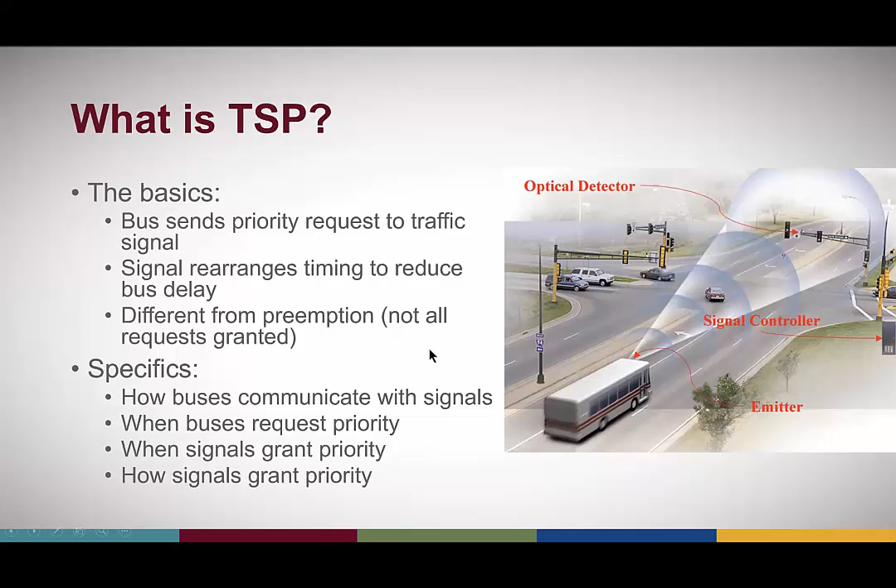There are many specifics when it comes to how a TSP system could be designed and how it could work. There are differences across systems in how buses communicate with signals, when buses might request priority, when signals might actually grant priority, and how signals grant priority, what type of priority they actually give. So there's a lot of specifics and details, and every deployment we've seen is a little bit different from others. But that should give you a basic understanding of what TSP is.

Now, we're going to use some terms in the webinar today, and these terms are also used in the report, which is Synthesis Report 149. We use the term TSP system to refer to the hardware and software components and modules that are working together as a whole in order to give priority.

We'll talk about system architectures, which are the functional design of the hardware, software, and communication interfaces. How is the system actually put together? What type of communication technology is being used, et cetera. That is a system architecture.

And we'll also talk a lot about business rules and parameters. When it comes to TSP, like I mentioned earlier, not every request for priority is granted. The decisions and the rules for granting or requesting priority, we call those the business rules. Those are the business rules of the TSP system. When should a bus ask for priority, and when should it be granted?

Parameters are the specific values that are associated with a business rule. So if there's a business rule that buses have to be late before they ask for priority at an intersection, well, the parameter is how late, right? Is it 1 second late, 20 seconds late? So the parameters refer to those specific values associated with business rules.

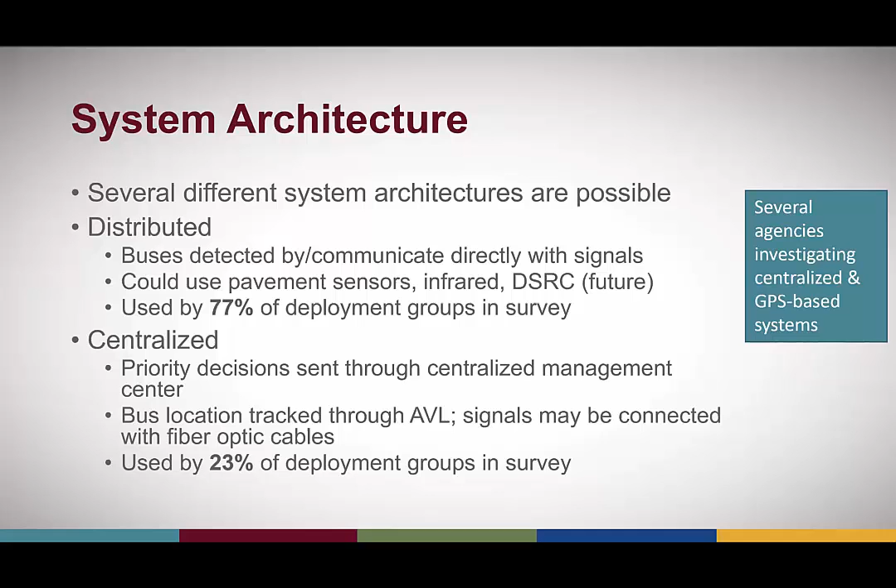This distributed setup was used by 77% of the deployment groups in our survey. The other big grouping is centralized architectures. In a centralized architecture, priority decisions are sent through a centralized management center, which could be the transit agency's management center, or a traffic management center managed by the signal owner, or potentially involving 2 centers. In this type of system, the buses' location is tracked continuously through AVL, an automated vehicle location system, and the signals would have to be linked to the center in some way, one method being through fiber optic cables. This kind of setup was used by 23% of the deployment groups in our survey.

One of the other key distinctions is whether there are any operational status requirements that buses have to meet in order to request priority. In our study, 13 respondents said that buses do have to meet a condition before they're able to request. The most common condition, which all 13 were using, was schedule deviation, meaning a bus has to be behind schedule, either behind at all or behind by some amount, which is the parameter value also in our report.

One thing mentioned in several research studies was that this could be done by headway deviation as well. We didn't capture any agencies in our survey currently doing this, but we did capture 2 agencies that had a passenger load requirement, meaning a bus has to be carrying a certain number of passengers, otherwise it's not eligible for priority. But overall, the majority of agencies that responded, 18 of 31 deployment groups, were not using any operational status condition.

There are several different types of priority that buses can receive when they send a request. These are explained in more detail in our report, including diagrams that show the signal phases and how they will be rearranged to give a bus some priority. But broadly speaking, the most common one, used by 28 of 31 deployment groups, was an extended green, which just holds a green light a little bit longer to give the bus time to get through.

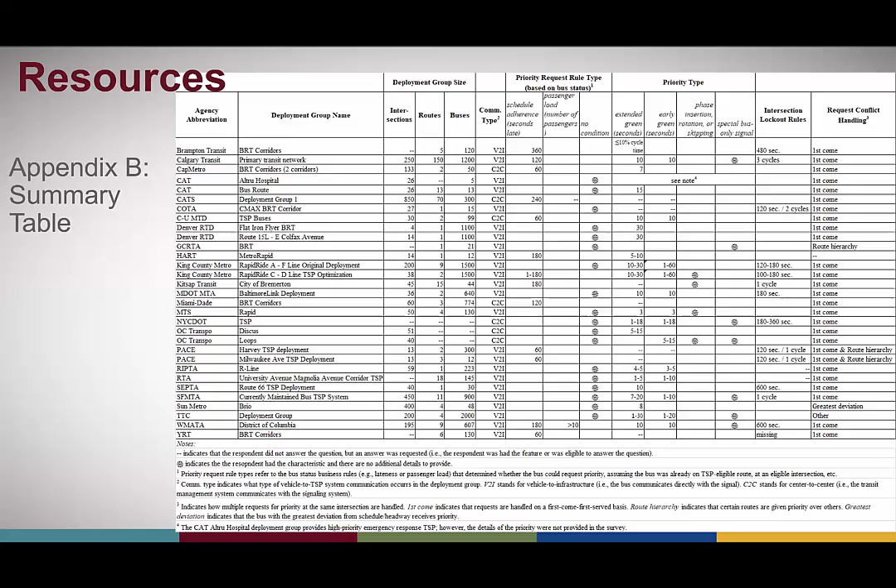For the next phase of this webinar, we'll hear from two of the case study agencies. With that, I'll turn it over to Owen Kehoe. Thank you, Paul. Let me get my screen shared here.

My name is Owen Kehoe. I'm a traffic engineer at King County Metro Transit in Seattle, Washington. I work in a group called Speed and Reliability, and I've been working on TSP for almost 20 years now, doing everything from planning to design to implementation and sometimes maintenance when needed.

So today I'm going to first share some King County facts and show you where we have TSP deployed. I'm going to talk about our TSP system architecture, the TSP goals we've employed, specific TSP strategies we've used. I'll outline a negotiation process that we use with our city partners and how we agree on what we're going to do. Then I'll talk about some of the benefits we've measured, and then a preview looking towards the future of our next-gen TSP system.

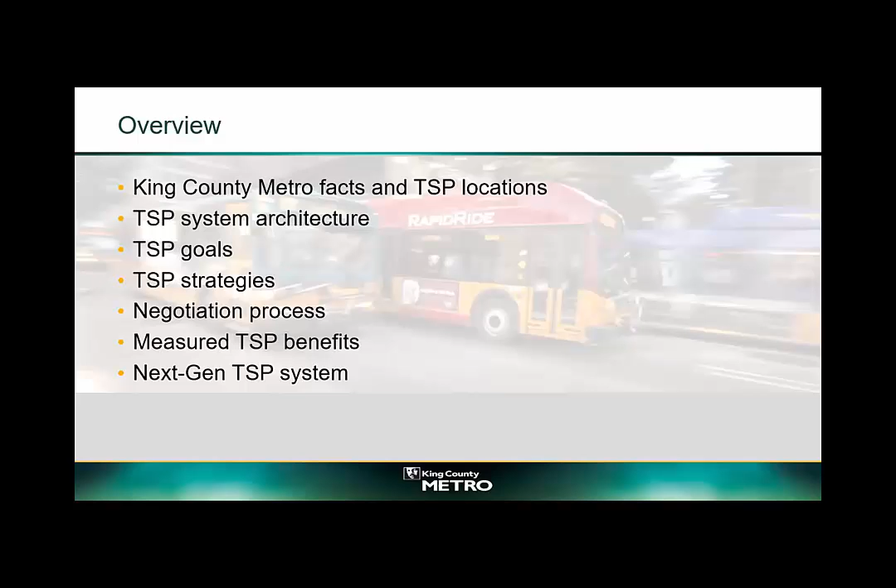For those not familiar with King County Metro, here are some quick facts and figures. We are the primary transit agency serving Seattle and the surrounding area. Our fleet size is a little over 1,600 vehicles, including electric trolley buses, diesel electric hybrid buses, and a few battery electric buses. Just yesterday, we retired our last diesel-only coach, so we consider ourselves a fully green fleet. Before COVID, we had about 400,000 daily weekday boardings; of course, that's lower now. Also, Sound Transit is the regional transit provider, and we operate their light rail trains, streetcars, and Sound Transit Express buses.

For TSP, we currently have it deployed at a little over 200 intersections. These are mainly on the RapidRide corridors, which are BRT service, so we have the A through F lines. We also have it on a few other high ridership corridors. Of these locations, we work with 13 cities or jurisdictions, including the state DOT for TSP.

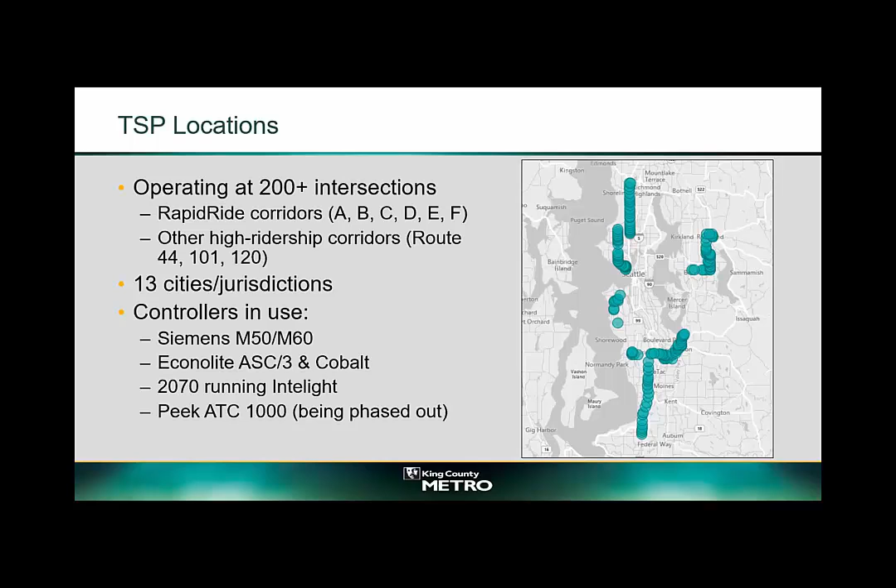The controllers we use, mostly we use the Siemens M50, M60 controllers. That's what Seattle uses. Some of the suburban cities use the Econolite ASC3s and Cobalts. The state DOT uses 2070s running Intelight MaxView. And we have a handful of Peek ATC 1000s in the city of Seattle, although those are gradually being phased out.

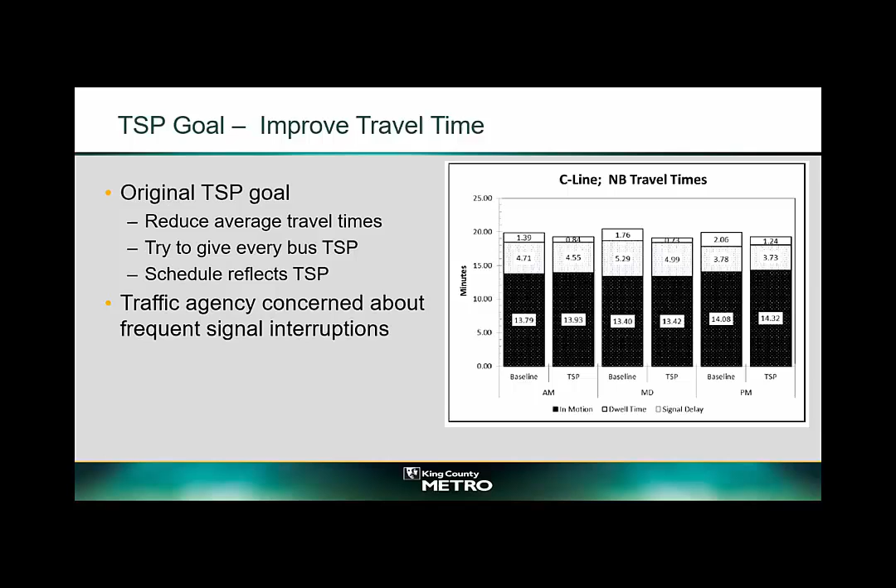Here you can see an evaluation of this strategy. This is travel times split up by in-motion, dwell time, and signal delay, and you can see we've been successful in reducing the signal-related delay with TSP. The disadvantage of this goal is that the traffic agency will be concerned about the signal being interrupted every time, which limits the amount of benefit we're able to get through individual TSP calls.

A newer goal we've been doing is a reliability-based goal. Instead of trying to give every bus TSP, we're trying to focus on those late buses and get them through faster, with the goal of improving either on-time performance or headway.

Now getting into some of the strategies we use, we have what we consider standard TSP strategies, similar to the ones Paul described: green extensions, early greens, or red truncation. In some locations we do what's called full priority, a Siemens term, which is basically allowing phase skipping.

The business rules we use: we have route eligibility, so generally only specific routes are eligible for TSP. We have to provide a recovery period after one TSP activation, usually varying between 60 seconds to 5 minutes. And of course, we can't violate any minimum greens or vehicle or pedestrian clearance intervals.

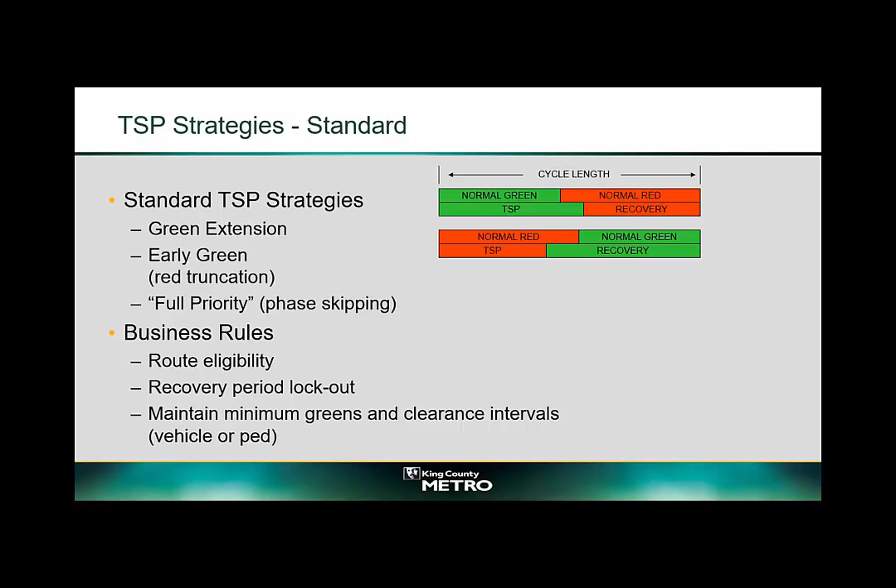Some of the more advanced strategies we've used are, in some locations, a tiered request level, where depending on whether the bus is on time or late, it will request a different level of TSP.

In some locations, we proposed doing cascading priority. So if you have a bunch of intersections close together, one bus will check in at multiple intersections at the same time. So far, we've only been able to do this in theory. We haven't been able to deploy a cascading priority system yet because it requires a pretty complex peer-to-peer setup at the signal controller level. We just haven't been able to get that up and running yet.

We also do priority at nearside stops. The way that works is we have the bus check in before the bus stop, and then we look at our historical dwell time for that bus stop. We try to predict when the bus will leave, and that gets programmed into the controller as the time of service desired setting. It's basically an ETA.

This chart shows how we plot the dwell time, and we're looking at that. This is a cumulative dwell time distribution.

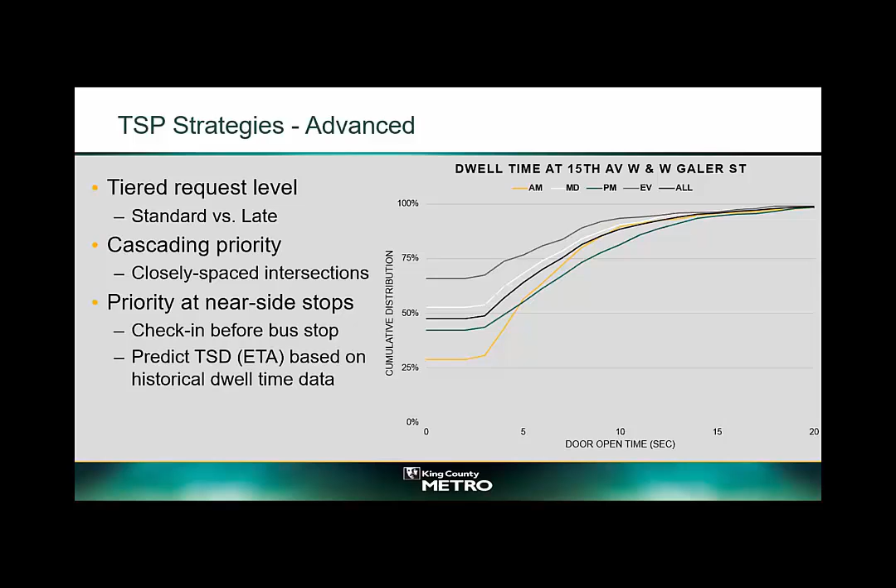Some of our city partners have installed adaptive signal control, and we've successfully integrated TSP into those. In Seattle, they run SCOOT, which has a pretty extensive set of capabilities for extensions, red truncations, and phase skipping. We've tested this at just one location so far, First Avenue North and Mercer Street.

But there'll be more of these to come in the future. In the city of Bellevue, they run the SCATS system, and unfortunately it doesn't do TSP out of the box. So we've had to kind of jury-rig it by adding extra stages that provide those green extensions and early greens, basically using a detector call to then call that special stage.

In the city of Renton, they run ACS Lite, and it does kind of the standard extensions and truncations.

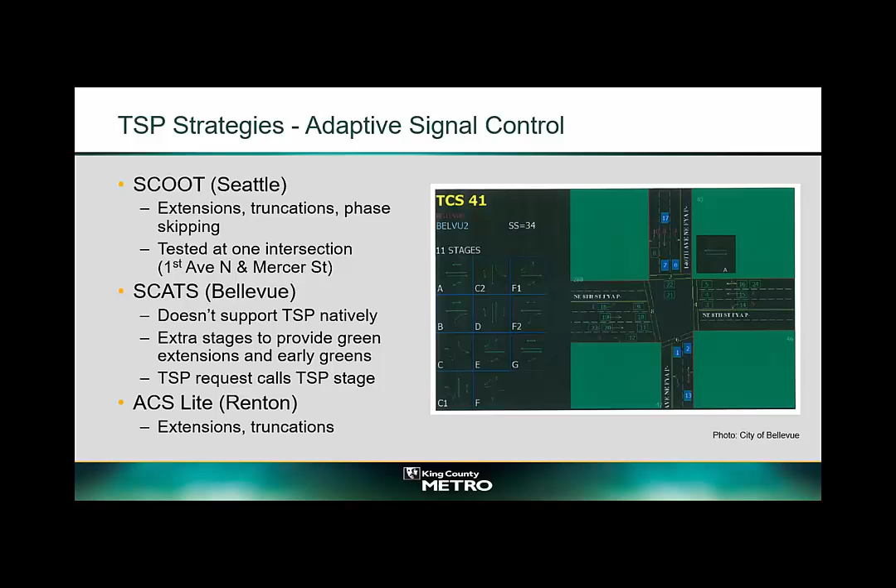So now I'm going to outline what I consider to be a 4-step process for negotiating the TSP strategies with the local agency, and I think we've been pretty successful in using this process.

The first step is agreeing on the overall project goals. What are we trying to do here? Are we trying to reduce travel time? Do we want to improve reliability? Which routes are we going to focus on? These are pretty high-level discussions, involving directors and planning staff. A lot of times in smaller cities in particular, the traffic engineers may not be so keen on TSP, but sometimes we'll find an ally in the planning department.

And we're looking at data on route level performance to help inform these decisions. Step 2 is we start looking at individual intersections and trying to decide what we're going to do at this intersection, at this time of day, in this direction. This involves kind of the mid-level manager staff. So we look at delays, we look at the data about where the delays are occurring, we look at traffic volume to capacity ratios and pedestrian activity, particularly if we're proposing phase skipping.

We really get down into a fine-tooth comb, defining what strategy is used by direction and time of day. The key outcome is that we come up with a spreadsheet that documents all these decisions. This is an excerpt of that spreadsheet. We've got all our intersections listed, all directions, and then by time of day we're documenting which strategy we're doing, and if it's a lateness strategy, how many minutes late it has to be to trigger that strategy.

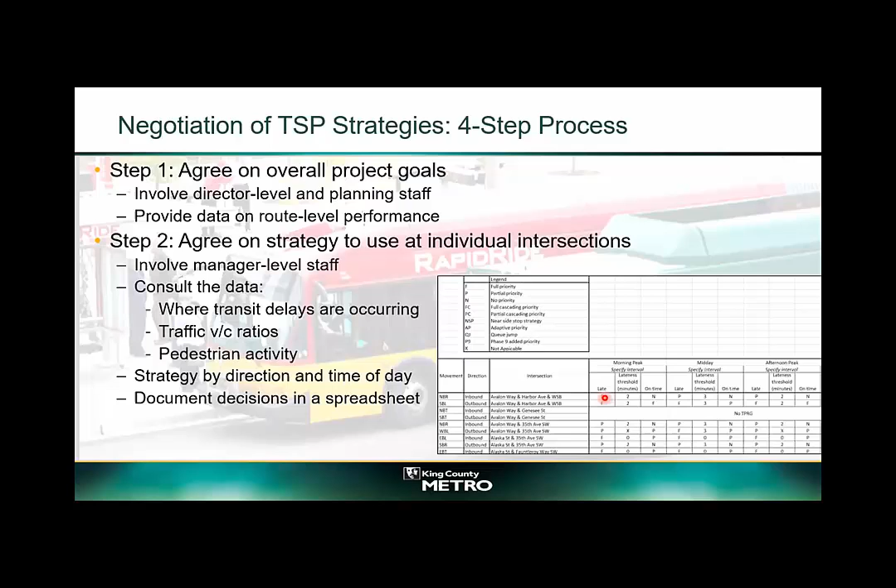Step 3 is where we bring in the signal operations engineers, and this is where we really get into what actually gets programmed in the signal controller. Basically, we're using that spreadsheet from step 2 as a guide. One thing we found is that these signal operations engineers tend to be pretty reluctant to do anything to upset their carefully crafted signal timing plans. So if we do our homework in steps 1 and 2, it helps provide some motivation for them to really follow that.

With some of our smaller cities, we can bring in outside expertise, either in-house or consultants. Some of them may not be as familiar with the TSP settings, so that's been helpful.

This is an iterative process where we'll implement something in the field, watch some buses go by, and then fine-tune the settings as needed. We do record these in a spreadsheet, although once we walk away, the agency will often change settings without letting us know, so those spreadsheets aren't all that useful.

The fourth step is operations and maintenance. We can't just let the system run by itself, we do have issues that arise, and here's an example of a type of issue we have to fix. Besides these kinds of issues, we'd like to retime the TSP every 6 years, but unfortunately it's become a real challenge to get budget available for TSP operations and maintenance, so we haven't been able to maintain our retiming program.

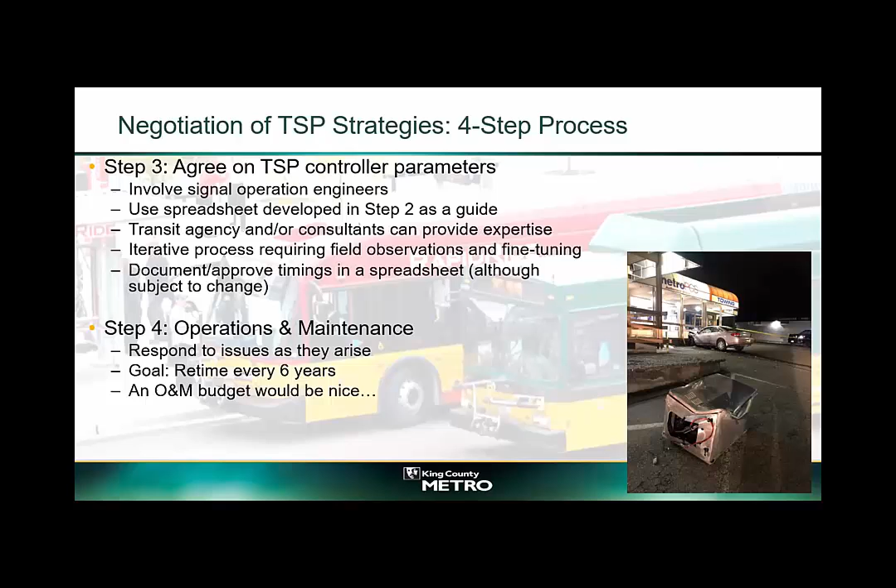Some of the benefits we've measured from TSP under the original travel time strategy: we generally see a 15 to 20% reduction in signal-related delay, just looking at signal delay, and with overall travel time we see around a 5% reduction. These were measured by turning the system off for a week or two and then turning it back on, comparing the on and off data.

With our more recent reliability strategies, we did this most recently in 2018 on our RapidRide C and D lines. There we implemented a tiered request level, where the level of TSP is based on the lateness of the bus. I put lateness in quotes because the RapidRide lines are actually a headway-based system, and their performance is measured on headway. Our goal was to reduce headway, but our CAD-AVL system didn't provide any information on headway, only a lateness field, so that decision has to be made based on lateness.

Looking at the all-day picture on both lines, we see a 6% reduction in buses missing that headway target, where the target is being within 2 minutes of the scheduled headway. But we saw significantly more benefit on some PM outbound trips during the afternoon commute — on the C line we saw up to 30% reduction. I should note this was not an on-off study; it was comparing our previous travel time strategy with our new reliability strategy, so these benefits are in addition to the travel time improvements.

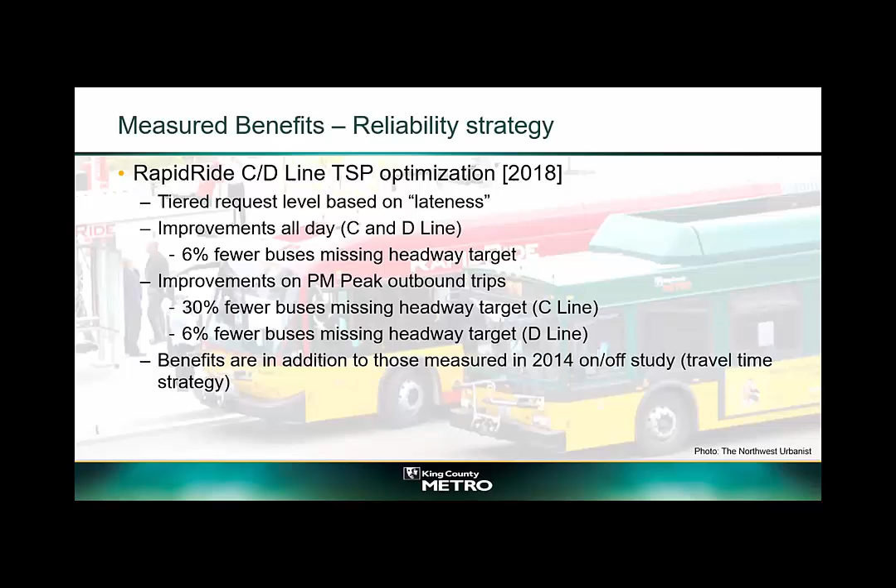Looking towards the future, we're planning our next-gen centralized TSP system. The way this is envisioned to work is that buses will use a cellular connection with a constant location ping, about once a second, sending their location to a central server. We'll process that data, add additional fields, and send it along to the local traffic agency's central server. We're calling this our subscription service, where the local agency subscribes to a data feed from King County. The local agency then generates the requests, processes the business rules, and those get forwarded along the city's traffic network out to the signal controller.

The advantage of using this centralized system — the big one — is that we don't have to put in all that expensive roadside equipment and maintain it. Also, we're not building a duplicate communication network; cities have done a pretty good job building out their fiber network to their signal controllers, so we might as well use that. Most signal vendors also have a centralized, off-the-shelf TSP product we're able to use, so we don't have to reinvent our own central system. We hope the system will have improved accuracy and reporting capabilities, and we're hoping it will be ready towards the end of next year.

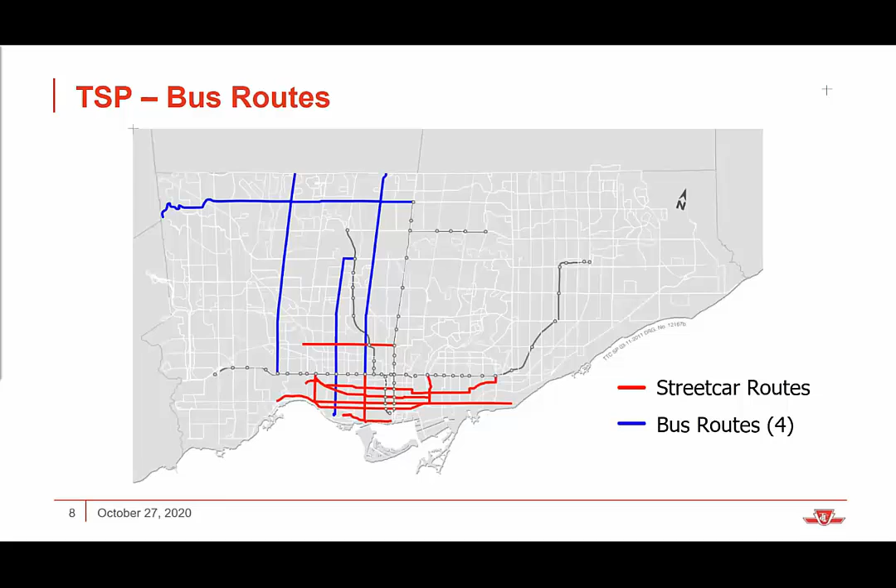Our TSP implementation to date is about 400 intersections since our pilot - about 200 on 7 streetcar routes in the older part of the city, 200 to date on 4 major bus routes, and we have several locations where we have isolated transit signal priority, mainly to accommodate buses making left turns.

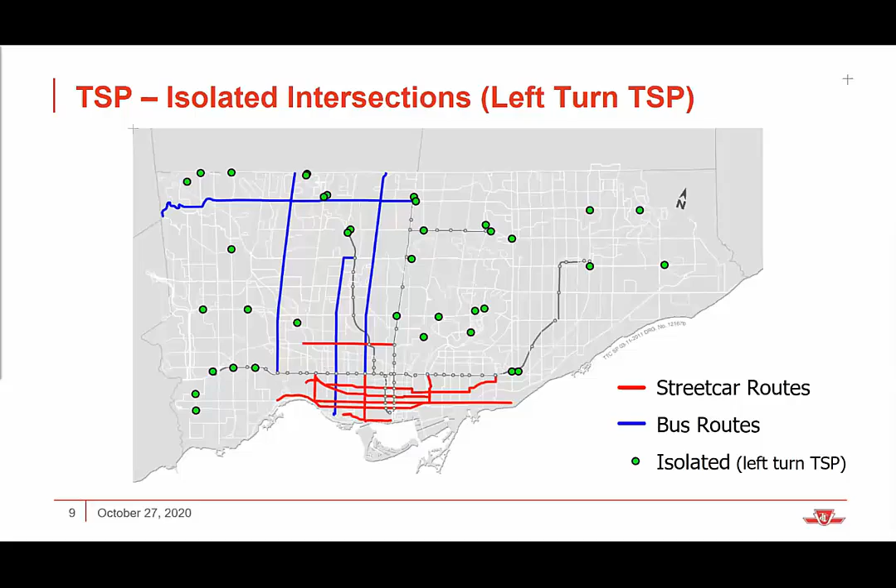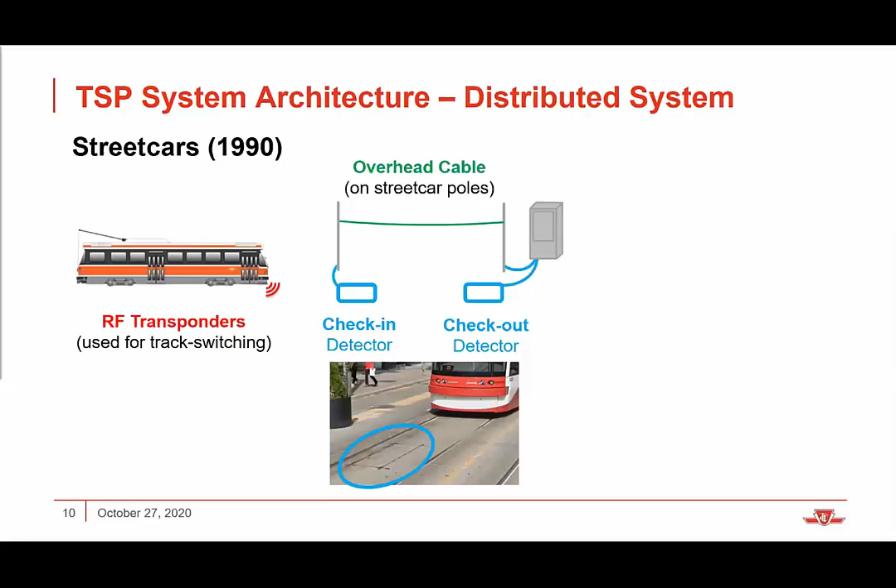We have a distributed architecture at the TTC because we started with streetcars. We decided to piggyback off our existing radio frequency transponders that are on every streetcar and are used for track switching purposes. We use check-in and check-out detectors that are embedded into the track bed itself, and historically we've run overhead cable on our own streetcar poles back to the traffic signal controller.

We had Novax create a custom streetcar receiver module to receive these signals from the transponders, and then the TSP calls go into the traffic signal controller. This has provided us a very accurate and reliable detection system, assuming, of course, that the loops and the feeders are not damaged due to construction.

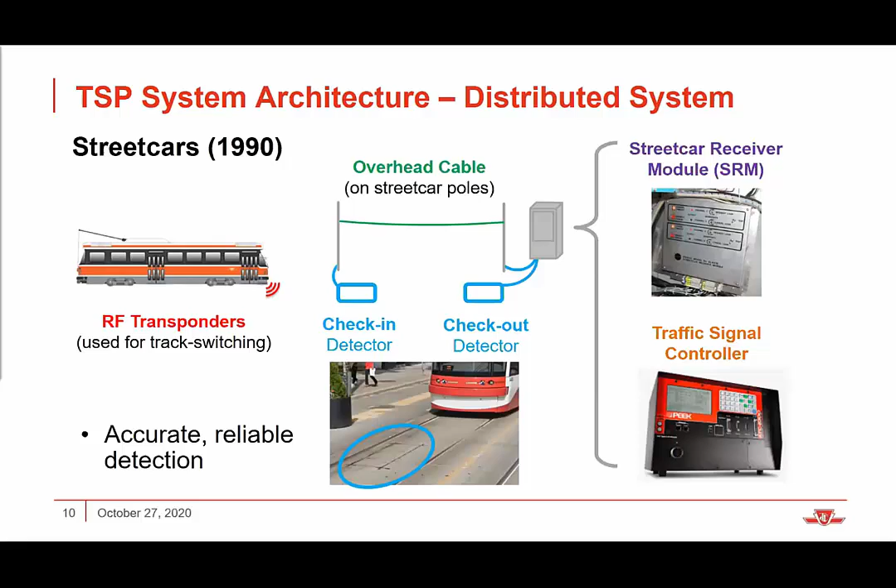Around 1998, we worked with Novax again to develop a bus transponder that would be compatible with the streetcar receiver module, mounted on the underside of the bus. Again, we used overhead cables back to the streetcar receiver module and the controller. The big difference, of course, being that we don't have streetcar poles on the bus network.

So our overhead cable was on Toronto Hydro poles. This has been a challenge because for several years now we've had issues trying to get pole attachments compared to what we were able to do in the early days of our implementation. We have done limited locations with wireless communication back to the traffic signal cabinet.

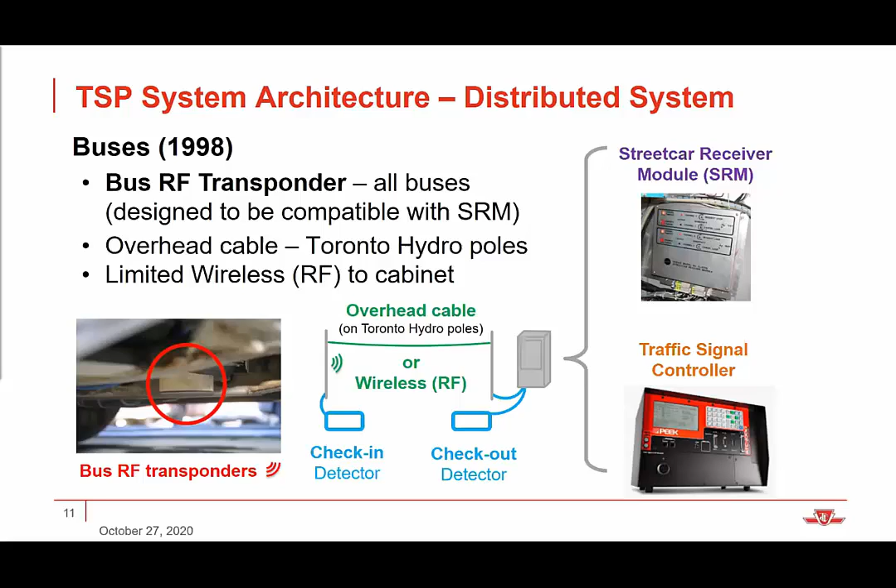So for our business rules, at a high level, we do extensive use of green extensions - we've done a lot of development there that I'll go into in a couple slides. We do early greens, though not in as many locations as some cities, primarily because a lot of the signals we operate through are already at the minimum pedestrian signal timings for the side street, and in Toronto there are a lot of pedestrians and a lot of pedestrian calls.

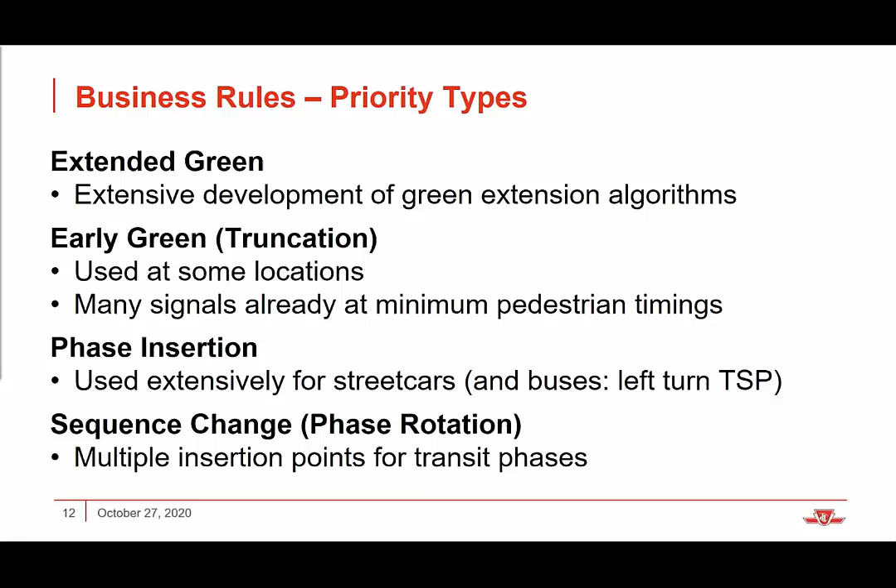We have extensive use of phase insertion for streetcars and for buses. We have a type of sequence change or phase rotation, because we often allow multiple insertion points for transit.

So we have a very old system, and it was never practical, based on our legacy AVL system - our vehicle location system - to have a type of schedule-based priority. It just simply wasn't accurate or reliable enough. We're moving to a new system, so things may change with the new system.

Historically, we haven't had a lockout of TSP calls following the previous TSP call. There are some exceptions in what we call the priority operating zone, when a vehicle is between the check-in and check-out loops. If a second vehicle enters, and that's very common because we have very low headways of 3 minutes or less, the second vehicle is essentially invisible. We also have implemented lockouts for the specific case of streetcars at far side platforms to prevent a following vehicle from calling an extension unnecessarily because they'd have nowhere to go.

But we do require approval for each intersection from our partners at the City of Toronto Transportation Services. So we need approval for every intersection where we propose TSP. There are also some cases where we do different types of TSP by time of day, and we actually have many different conditions and logic built into the controller, and I'll address that in a few slides.

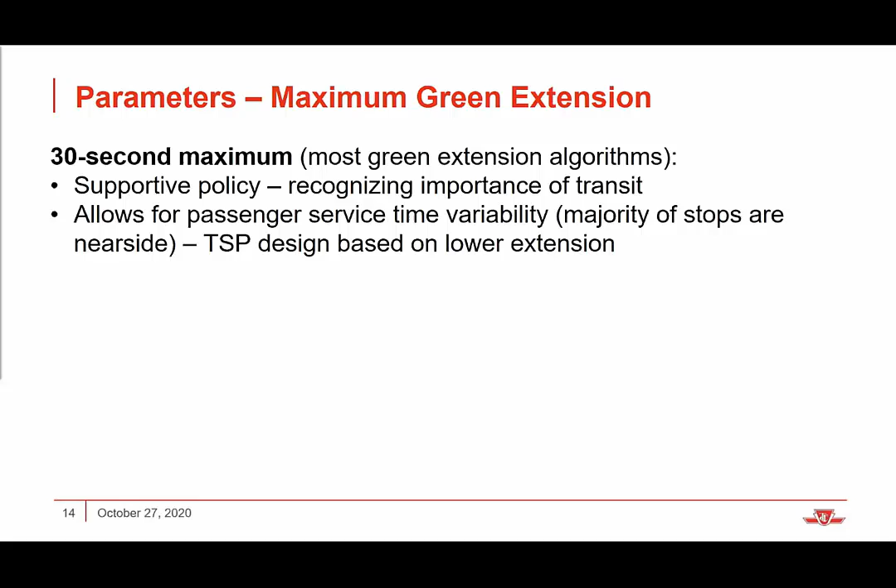One big difference that Toronto has is for most of our green extensions, we have a 30-second maximum extension as required. And this is based on the very transit supportive policy, recognizing the importance of transit in Toronto. It allows us to adjust for variabilities in passenger service time or dwell time, given that most of our stops are near side of the intersection. We actually designed TSP based on a 14 to 20 second design extension, so we have a little buffer. The maximum extensions are not restricted by signal coordination.

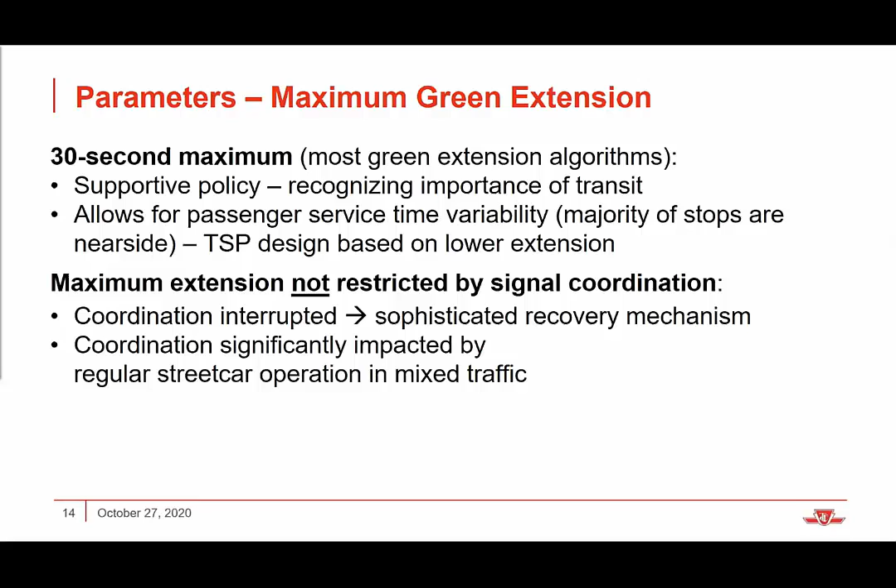Coordination is interrupted, and then we use a sophisticated recovery mechanism to get back into coordination. But it's important to remember in the Toronto context, for those of you not familiar with how streetcars operate, because all traffic must stop when streetcars are loading and unloading in the live lane of traffic, coordination is already significantly impacted just by the nature of having streetcars run every few minutes.

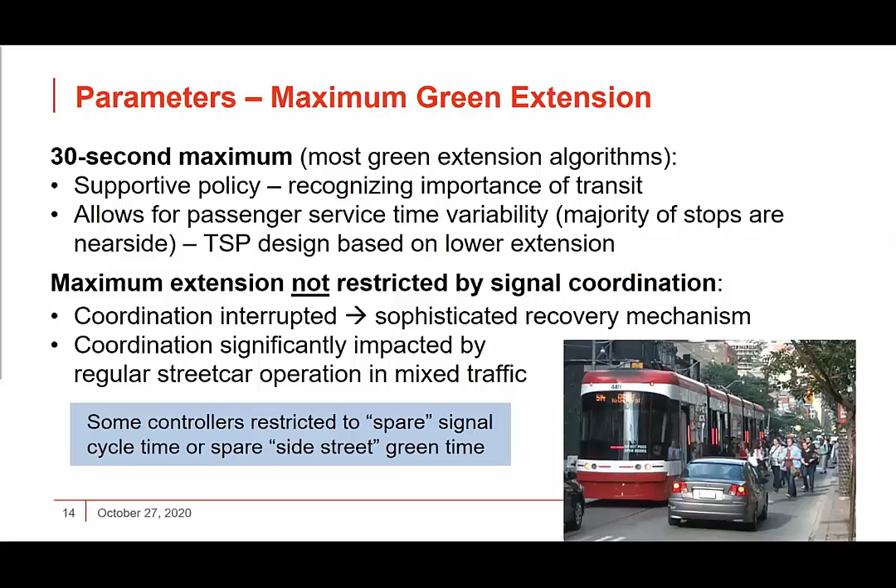It's important to know that because we don't restrict it to make sure the controller's in signal coordination, this is a very different approach than what's used in a lot of traffic signal controllers that do sometimes limit maximum extensions based on spare capacity in the cycle or the side street.

So we've done a lot of work developing TSP functionality because back in 1990 there weren't a lot of options. The City of Toronto had a main traffic signal system, which was a centralized traffic signal control system. Metro Toronto staff and TTC staff worked together in-house to develop TSP. Originally, it was actually using preemption, but with very specific rules and recovery routines to mitigate the impacts. So we worked over the years with the now City of Toronto to develop more advanced algorithms based on their changing policies and the capabilities and constraints of MTSS.

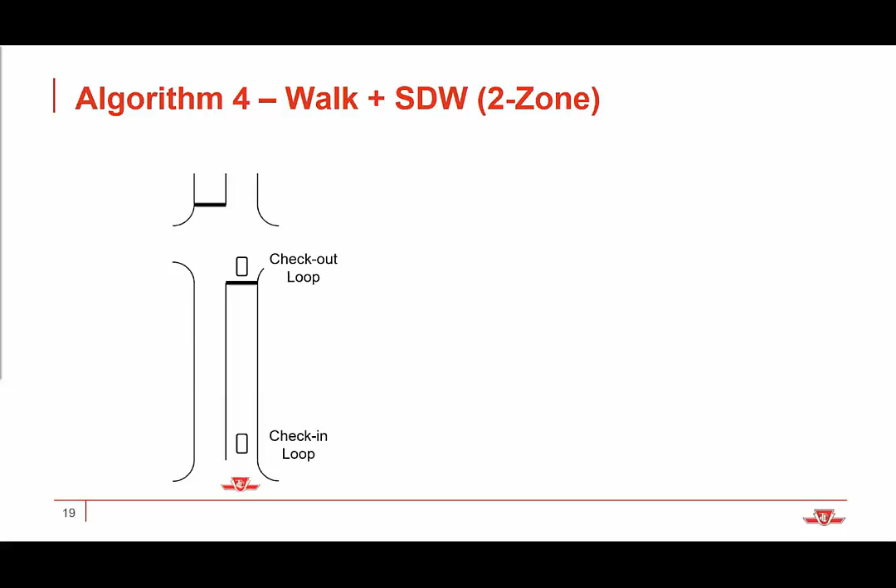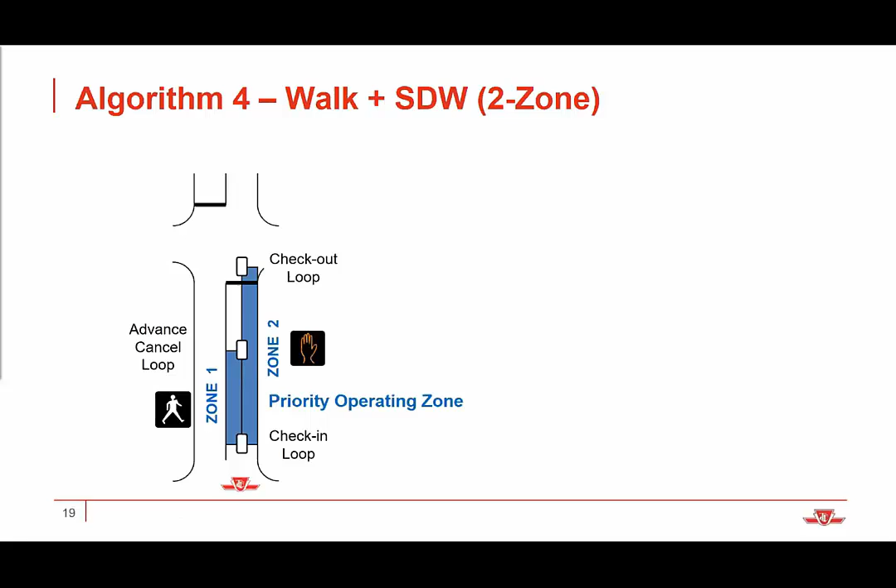I'm going to explain to you how this most complicated algorithm works, just to give you an idea. We normally have, as I mentioned, a check-in and a check-out loop. With this more complicated algorithm, the normal priority operating zone is split up with a new advance cancel loop. We have zone 1 that governs the extensions in green and walk, and zone 2 governs the extensions in green and solid don't walk. I'm going to show you what this looks like as the bus, shown by our icon, enters the priority operating zones.

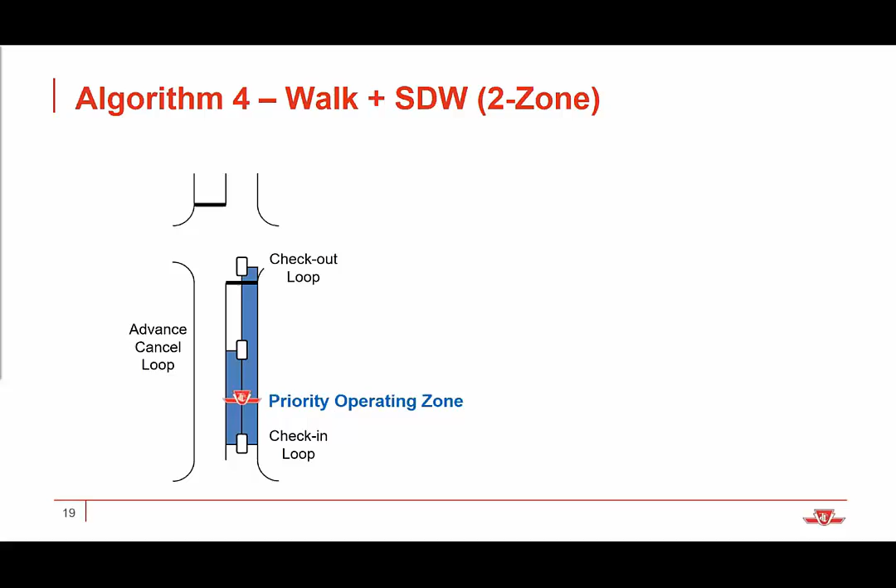So this is the regular signal display. I'm going to start the clock, and you'll see the signal going through the regular sequence, starting with north-south green and walk. For this algorithm, the decision point to provide priority is at the end of the green and walk before the flashing don't walk comes up.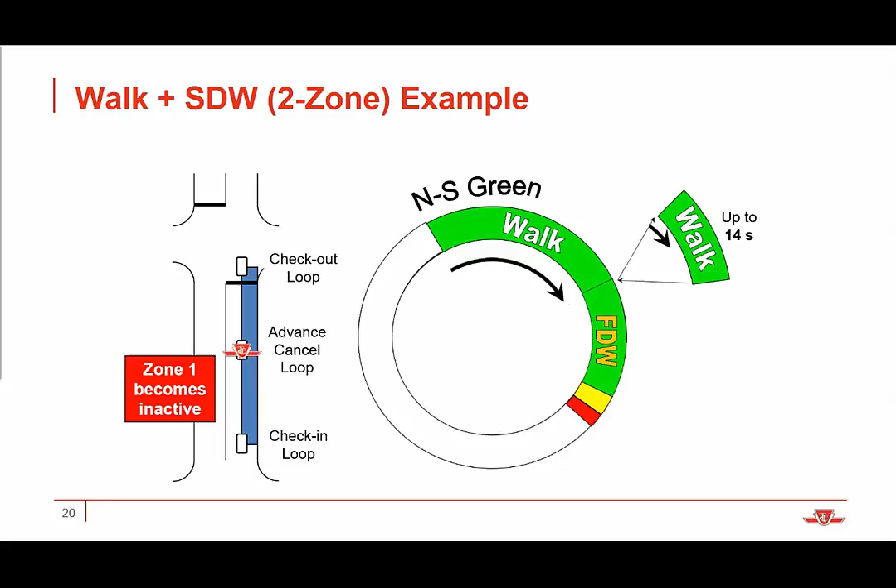Because both zones are active, we prepare to serve up to this 14-second extension in walk. But if the bus hits the advance cancel loop and the first zone becomes inactive before that 14 seconds expires, we terminate the extension, let's say after 6 seconds, and go immediately to green and flashing don't walk.

So the next decision point is at the end of the green and flashing don't walk. At this point, if the zone is still active, we prepare to serve a final 16-second extension in green and solid don't walk. I'll start the clock again.

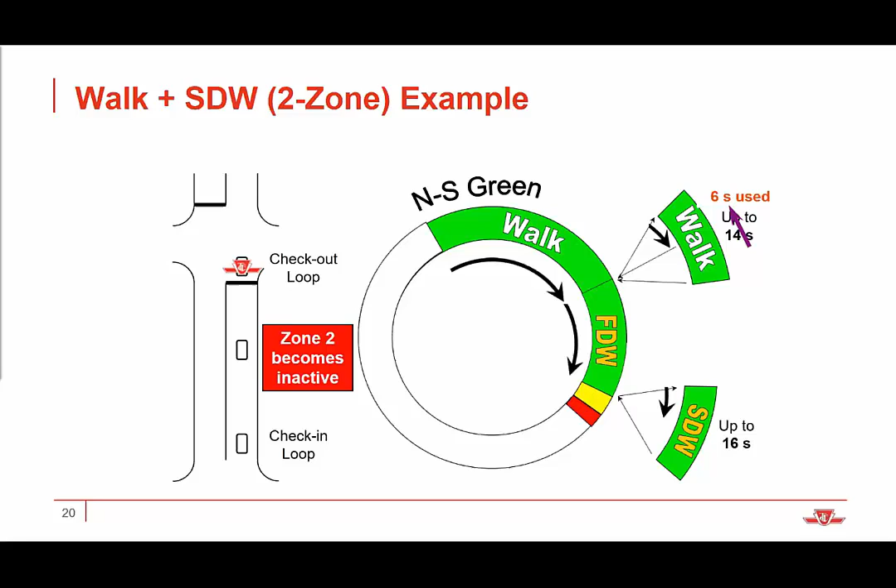Once the bus hits the checkout loop, the zone becomes inactive. We terminate that extension, and we go immediately to yellow. So with this particular example, we used 6 plus 7 seconds of extension, a total of 13, which would have been far less than what it would have been using just an extension of walk of 30 seconds if there was a lengthy flashing don't walk.

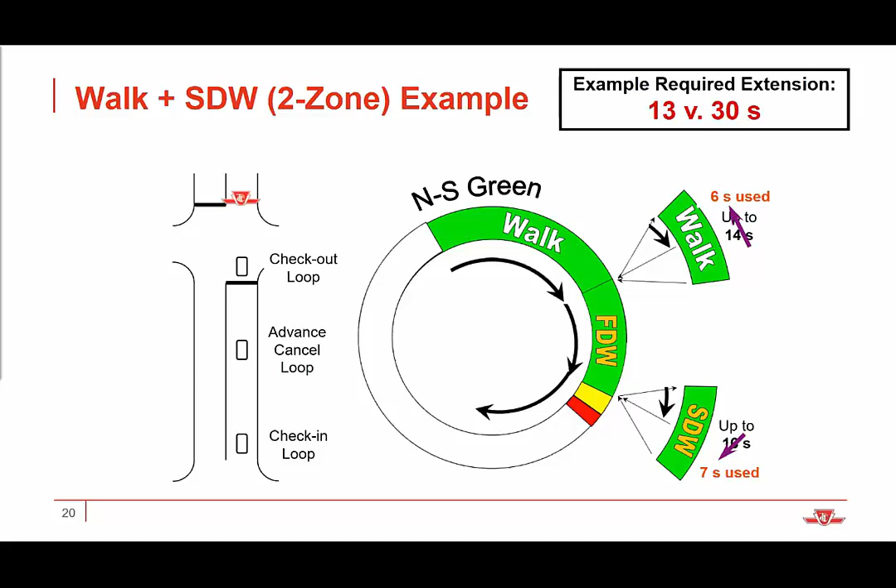So our business rules in the controller, the most important is really the decision point. We will only provide an extension for a vehicle that has a reasonable expectation of successfully getting through the intersection. We have certain parameters that we can use that delay it, similar to what Owen said, if the passenger service time could be variable.

Where we have competing TSP calls, we have a first sequenced, first served approach. So if we have both eastbound and southbound calls, if we're currently serving the east-west green, we will extend it if we think that the eastbound bus can get through, because the benefit of an extension is generally much greater than the disbenefit to the southbound bus.

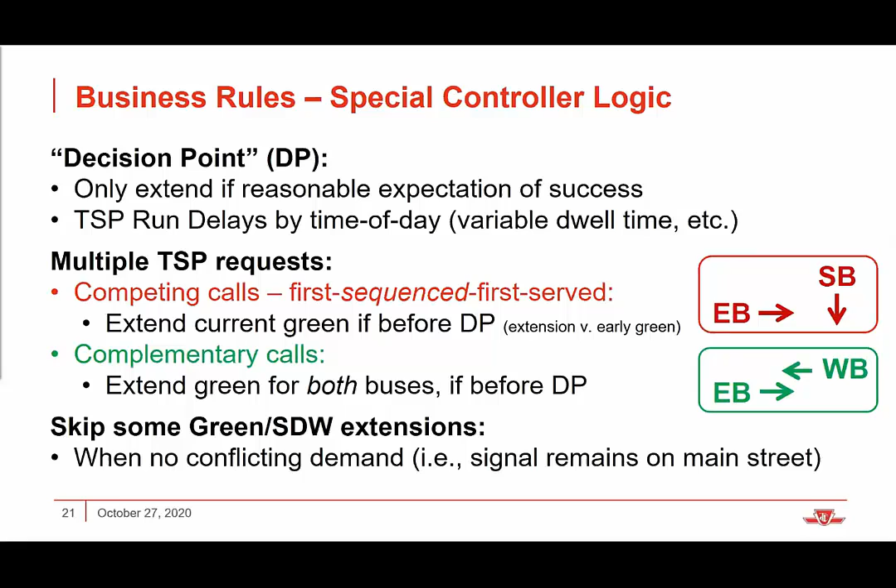For complementary calls, we will allow calls in both directions to come in if the calls both come in before the decision point, regardless of which one came in first. We will also skip some green and solid don't walk extensions if the controller is already not planning on serving the side street due to lack of demand, because it's unnecessary. I'm not going to talk a lot about red truncation.

We can essentially truncate any phase even below the pedestrian minimum if there is no PED call, and we can even truncate the main street if that would help a bus on the side street. Partial truncations are allowed.

We've done a lot of work on left turn TSP, where transit can extend an existing left turn arrow callable by either traffic, or there could be a location where only transit can call the arrow, and otherwise traffic can only turn on a regular green ball display. We have a lot of different ways we can do that, as shown. We also have special inserted phases, the vertical white transit bar that's used in Ontario, and this can often come up multiple times in a signal cycle.

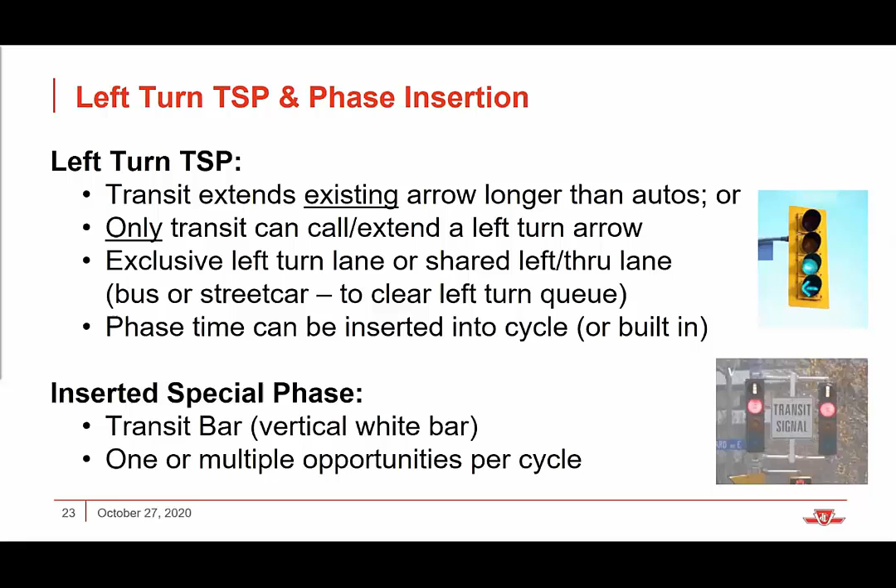I've mentioned we've done a lot of work on recovery and green compensation. In the old system, it would extend or reduce phase times based on preset values. With the new system, it's become much more flexible to allow the user to program various parameters as to when to extend, when not to extend, and exactly how much each phase should be extended or reduced.

Oh, sorry. Hit the wrong button there.

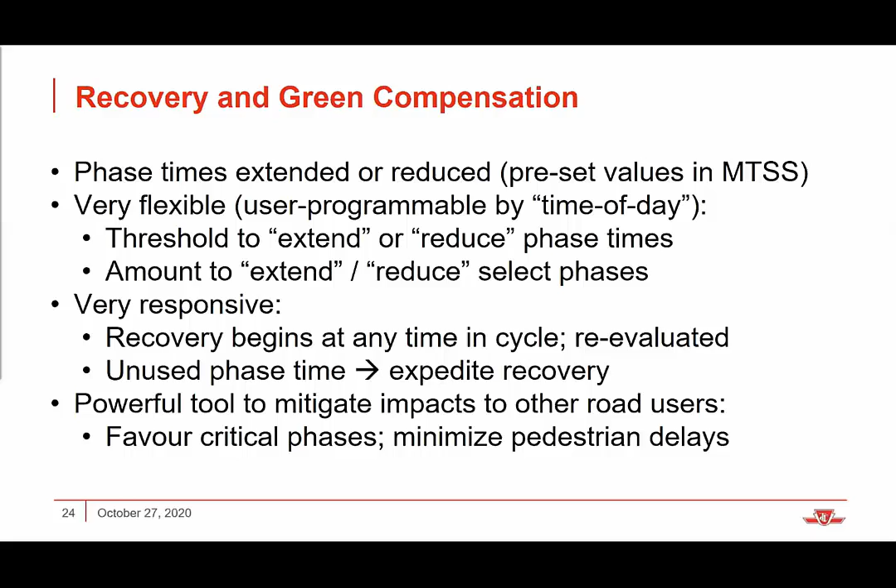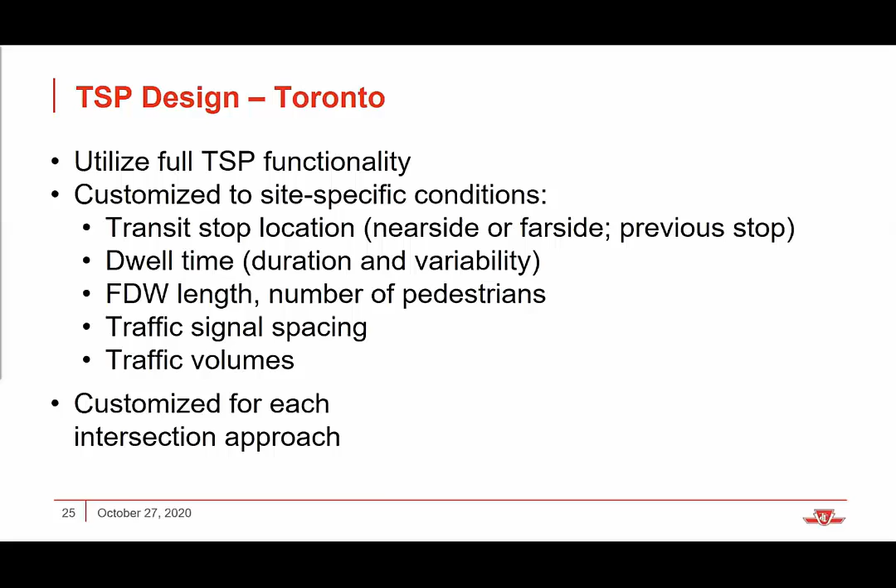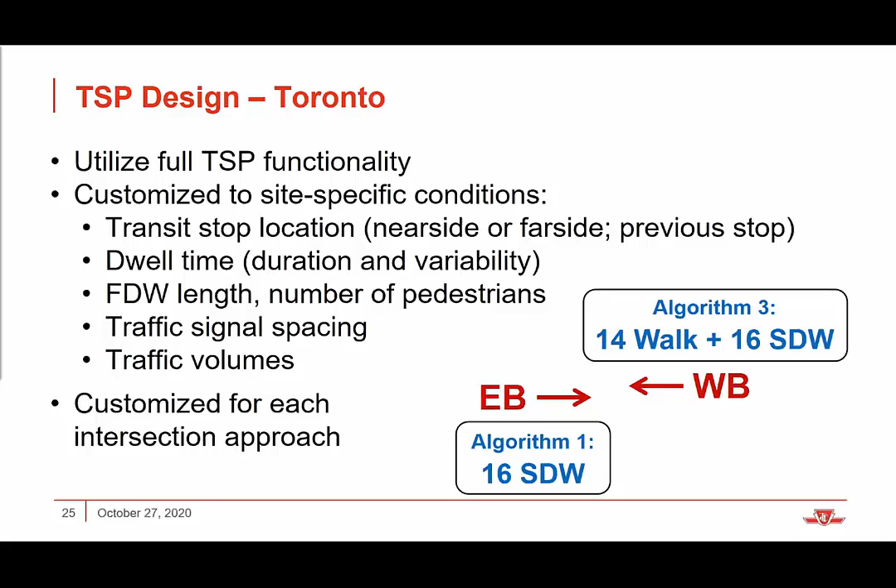In terms of the benefits we've received, based on surveys in the past, we've received a benefit of about 16 seconds round trip at a given intersection on a route with 40 traffic signals with TSP. This means we've been able to save about a 10-minute round trip time on the bus route. We often get more than the 16-second benefit for left turn TSP, so we've had faster travel times and have been either able to take vehicles out of service and maintain the same headway, or create additional capacity.

Our lessons learned: from our perspective, the benefits from TSP are entirely dependent on the signal controller's functionality with respect to TSP, recovery, and compensation, and also the level of priority granted and any extent of conditions imposed.